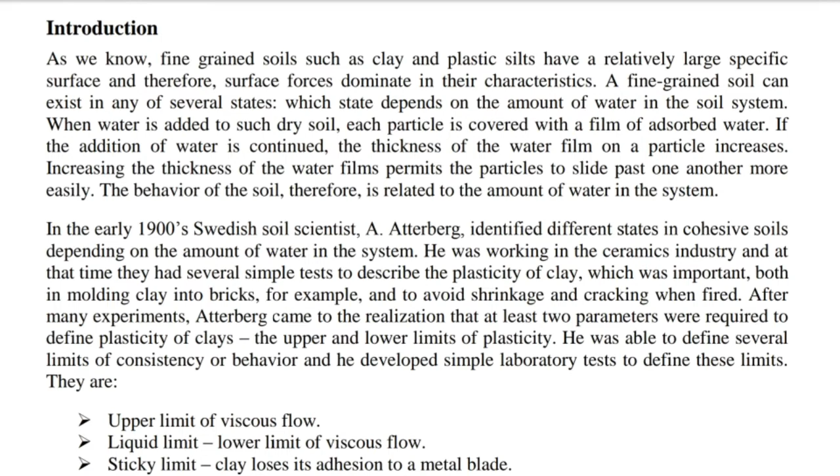They are: upper limit of viscous flow, liquid limit; lower limit of viscous flow; sticky limit, clay loses its adhesion to a metal blade; cohesion limit, grains cease to cohere to each other; plastic limit, lower limit of the plastic state; shrinkage limit, lower limit of the volume change.

He also defined the plasticity index, which is a range of water content where the soil is plastic, and he was the first to suggest that it could be used for soil classification. Later on, in the late 1920s, Terzaghi and A. Casagrande (1932b), working for the U.S. Bureau of Public Roads, standardized the Atterberg limits so that they could be readily used for soil classification purposes.

In present geotechnical engineering practice, we usually use the liquid limit LL or wL, the plastic limit PL or wP, and sometimes the shrinkage limit SL or wS. The sticky and the cohesion limits are more useful in ceramics and agriculture.

Since the Atterberg limits are water contents where the soil behavior changes from one phase to another phase, we can show these limits on a water content continuum. Also shown are the types of soil behavior for given ranges of water contents. As the water content increases, the state of the soil changes from a brittle solid to a plastic solid and then to a viscous liquid.

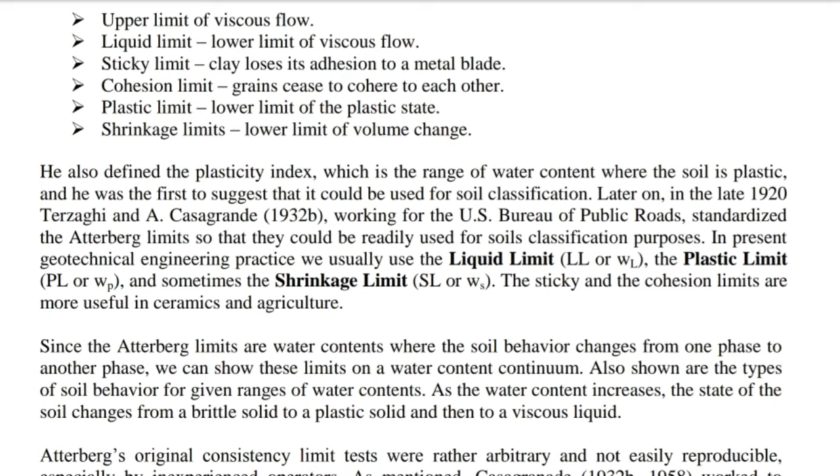Atterberg's original consistency limit tests were rather arbitrary and not easily reproducible, especially by inexperienced operators. As mentioned, Casagrande (1932b, 1958) worked to standardize the test, and he developed the liquid limit device, figure 3.2, so that the test became more operator independent.

He defined the LL as that water content at which a standard groove cut in the remolded soil sample by a grooving tool, figure 3.2a-b, will close over a distance of 13 mm (1/2 inch) at 25 blows of the LL cup falling 10 mm on a hard rubber or micarta plastic base, figure 3.2c.

In practice, it is difficult to mix the soil so that the groove closure occurs at exactly 25 blows, but Casagrande found that if you plot the water contents of tests where you get closure at other blow counts versus the logarithm of the number of blows, you get a straight line called the flow curve. Where the flow curve crosses 25 blows, that water content is defined as the liquid limit.

The plastic limit test is somewhat more arbitrary, and it requires some practice to get consistent and reproducible results. The PL is defined as the water content at which a thread of soil just crumbles when it is carefully rolled out to a diameter of 3 mm. It should break up into segments about 3 to 10 mm long.

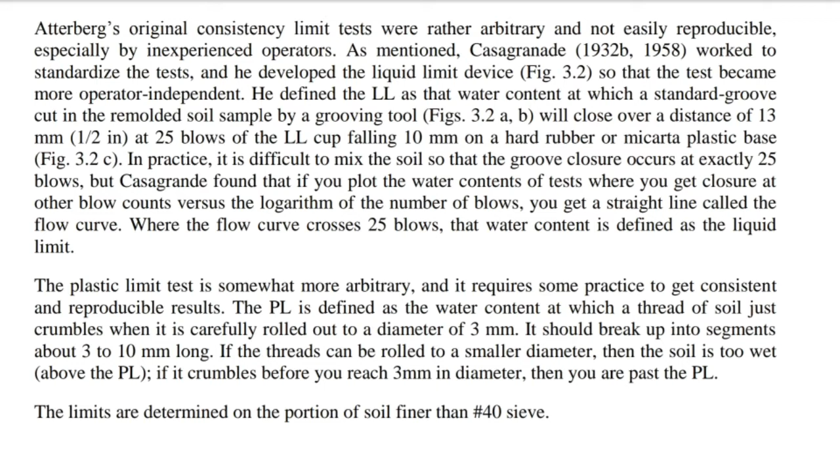If the threads can be rolled to a smaller diameter, then the soil is too wet, above the PL. If it crumbles before you reach 3 mm in diameter, then you are past the PL. The limits are determined on the portion of soil finer than the No. 40 sieve.

Shrinkage limit SL is defined as the moisture content at which no further volume change occurs with further reduction in moisture content. SL represents the amount of water required to fully saturate the soil, 100% saturation. It is needed in producing bricks and ceramics. Scope of the test. This test is performed to determine the plastic and liquid limits of fine-grained soils.

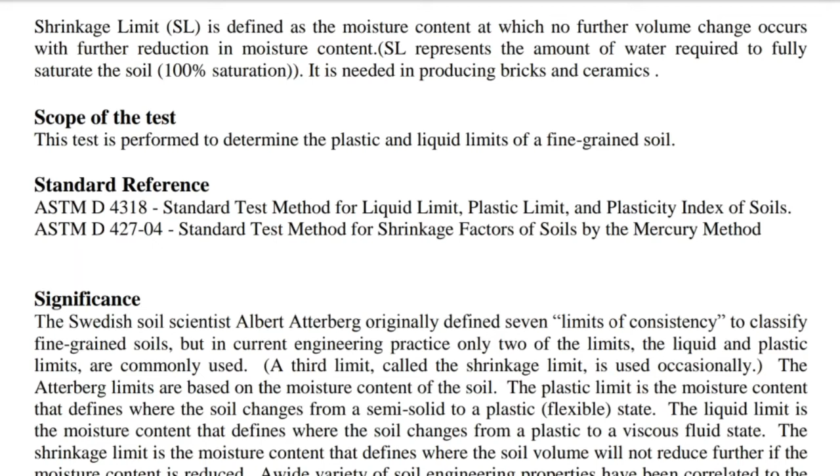Significance. The Swedish soil scientist Albert Atterberg originally defined 7 limits of consistency to classify fine-grained soils, but in current engineering practice, only 2 of the limits, the liquid and plastic limits, are commonly used. A third limit, called the shrinkage limit, is used occasionally.

The Atterberg limits are based on the moisture content of the soil. The plastic limit is the moisture content that defines where the soil changes from a semi-solid to a plastic flexible state. The liquid limit is the moisture content that defines where the soil changes from a plastic to a viscous fluid state. The shrinkage limit is the moisture content that defines where the soil volume will not reduce further if the moisture content is reduced.

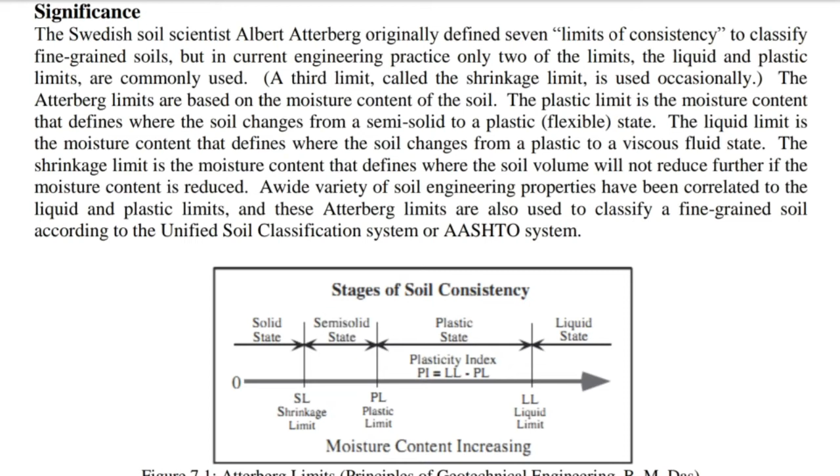A wide variety of soil engineering properties have been correlated to the liquid and plastic limits, and these Atterberg limits are also used to classify a fine-grained soil according to the Unified Soil Classification System or AASHTO system.

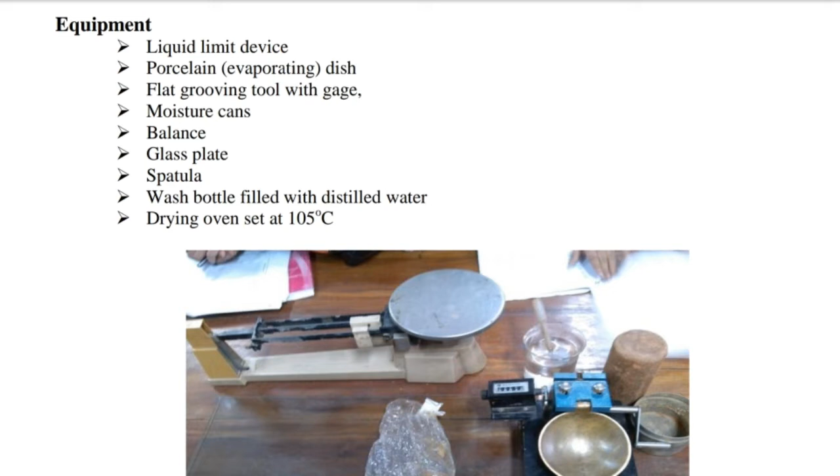Equipment: liquid limit device, porcelain evaporating dish, flat grooving tool with gauge, moisture cans, balance, glass plate, spatula, wash bottle filled with distilled water, drying oven set at 105 degrees C.

Test procedure. Liquid limit. 1. Take roughly 3/4 of the soil and place it into the porcelain dish. Assume that the soil was previously passed through a number 40 sieve, air dried and then pulverized. Thoroughly mix the soil with a small amount of distilled water until it appears as a smooth uniform paste. Cover the dish with cellophane to prevent moisture from escaping.

2. Weigh 4 of the empty moisture cans with their lids and record the respective weights and can numbers on the data sheet. 3. Adjust the liquid limit apparatus by checking the height of drop of the cup. The point on the cup that comes in contact with the base should rise to a height of 10 mm. The block on the end of the grooving tool is 10 mm high and should be used as a gauge. Practice using the cup and determine the correct rate to rotate the crank so that the cup drops approximately 2 times per second.

4. Place a portion of the previously mixed soil into the cup of the liquid limit apparatus at the point where the cup rests on the base. Squeeze the soil down to eliminate air pockets and spread it into the cup at a depth of about 10 mm at its deepest point. The soil pat should form an approximately horizontal surface.

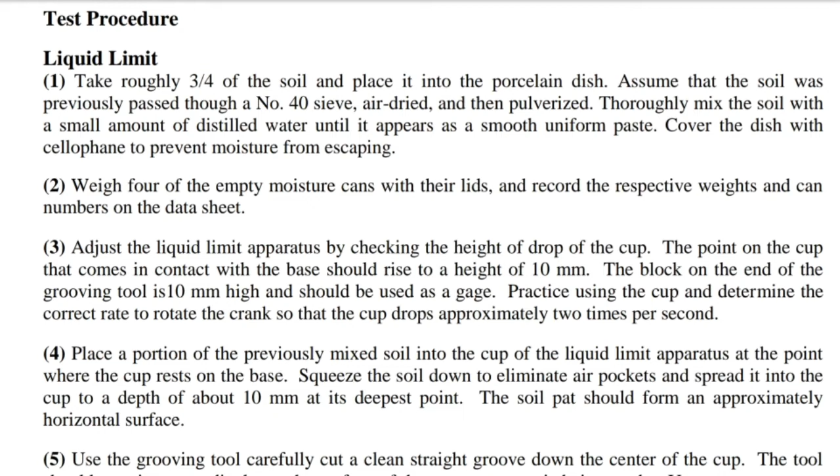5. Use the grooving tool carefully. Cut a clean straight groove down the center of the cup. The tool should remain perpendicular to the surface of the cup as the groove is being made. Use extreme care to prevent sliding the soil relative to the surface of the cup.

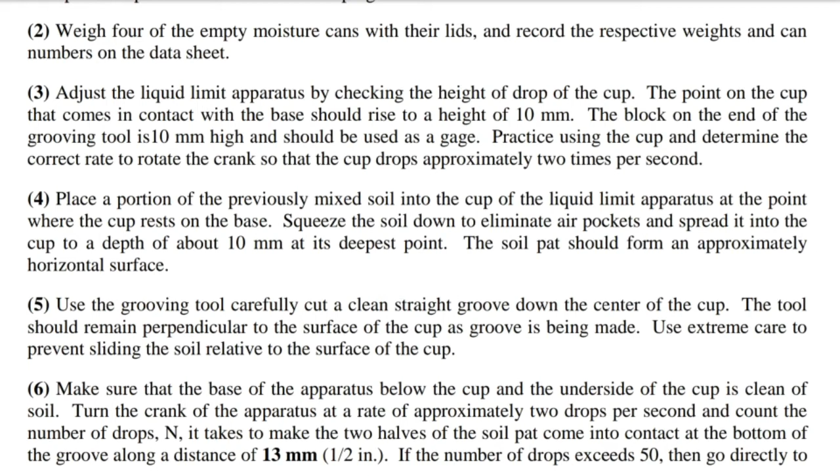6. Make sure that the base of the apparatus below the cup and the underside of the cup is clean of soil. Turn the crank of the apparatus at a rate of approximately 2 drops per second and count the number of drops it takes to make the two halves of the soil pat come into contact at the bottom of the groove along a distance of 13 mm, 1/2 inch. If the number of drops exceeds 50, then go directly to step 8 and do not record the number of drops, otherwise record the number of drops on the data sheet.

7. Take a sample using the spatula from edge to edge of the soil pat. The sample should include the soil on both sides of where the groove came into contact. Place the soil into a moisture can, cover it. Immediately weigh the moisture can containing the soil, record its mass, remove the lid and place the can into the oven. Leave the moisture can in the oven for at least 16 hours.

Place the soil remaining in the cup into the porcelain dish. Clean and dry the cup on the apparatus and the grooving tool. 8. Remix the entire soil specimen in the porcelain dish. Add a small amount of distilled water to increase the water content so that the number of drops required for closing the groove decreases.

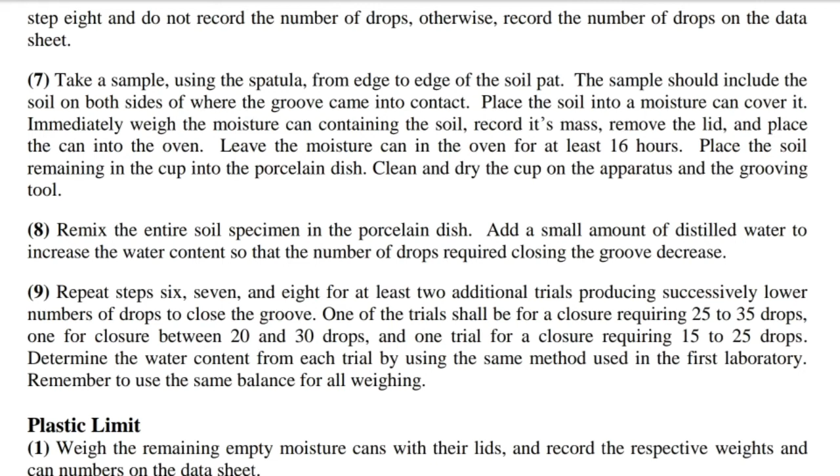9. Repeat steps 6, 7 and 8 for at least 2 additional trials, producing successively lower numbers of drops to close the groove. One of the trials shall be for a closure requiring 25 to 35 drops, one for closure between 20 and 30 drops, and one trial for closure requiring 15 to 25 drops. Determine the water content from each trial by using the same method used in the first laboratory. Remember to use the same balance for all weighing.

Plastic limit. 1. Weigh the remaining empty moisture cans with their lids and record the respective weights and can numbers on the data sheet. 2. Take the remaining 1/4 of the original soil sample and add distilled water until the soil is at a consistency where it can be rolled without sticking to the hands. 3. Form the soil into an ellipsoidal mass. Roll the mass between the palm or the fingers and the glass plate.

Use sufficient pressure to roll the mass into a thread of uniform diameter by using about 90 strokes per minute. A stroke is one complete motion of the hand forward and back to the starting position. The thread shall be deformed so that its diameter reaches 3.2 mm, 1/8 inch, taking no more than 2 minutes. 4. When the diameter of the thread reaches the correct diameter, break the thread into several pieces.

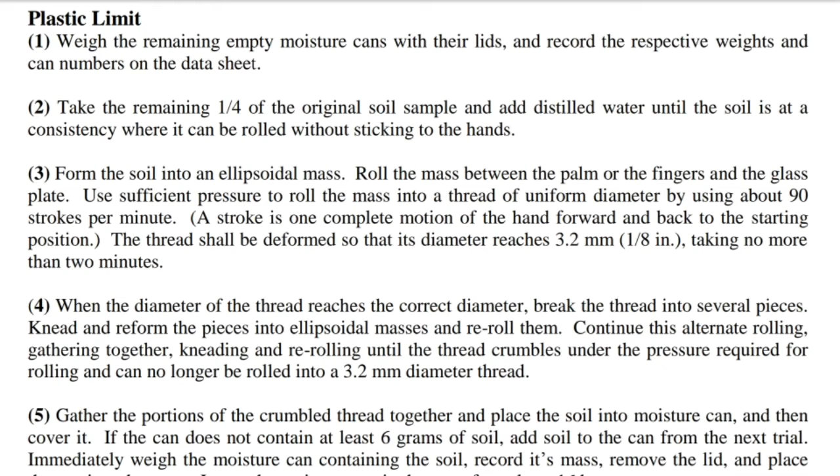Knead and reform the pieces into ellipsoidal masses and re-roll them. Continue this alternate rolling, gathering together, kneading and re-rolling until the thread crumbles under the pressure required for rolling and can no longer be rolled into a 3.2 mm diameter thread.

5. Gather the portion of the crumbled thread together and place the soil into the moisture can and then cover it. If the can does not contain at least 6 grams of soil, add soil to the can from the next trial. Immediately weigh the moisture can containing the soil, record its mass, remove the lid and place the can into the oven. Leave the moisture can in the oven for at least 16 hours.

6. Repeat steps 3, 4 and 5 at least 2 more times. Determine the water content from each trial by using the same method used in the first laboratory. Remember to use the same balance for all weighing.

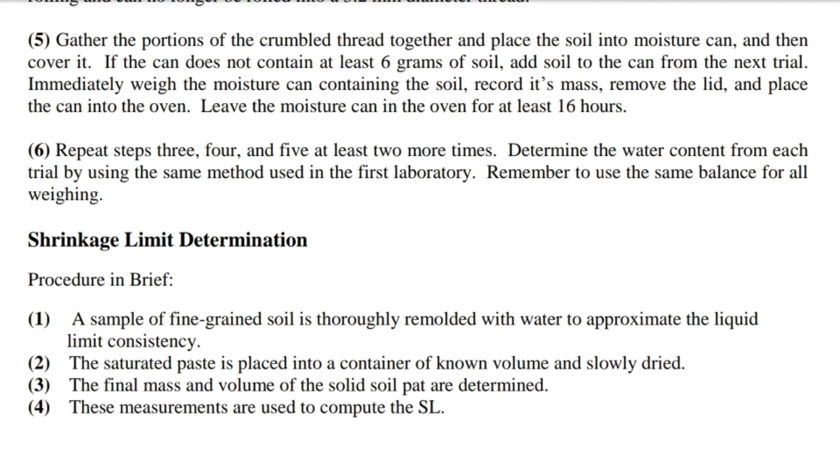Shrinkage limit determination. Procedure in brief. 1. A sample of fine-grained soil is thoroughly remolded with water to approximate the liquid limit consistency. 2. The saturated paste is placed into a container of known volume and slowly dried. 3. The final mass and volume of the solid soil pat are determined. 4. These measurements are used to compute the SL.

Procedure in detail. Volume of wet soil pat. 1. Make the soil paste of liquid consistency. 2. Coat the inside of the shrinkage dish with a thin layer of petroleum jelly, silicone grease or similar lubricant to prevent the adhesion of the soil to the dish. 3. Determine and record the mass in grams of the empty dish.

4. Place the shrinkage dish in the shallow pan in order to catch any mercury overflow. 5. Fill the shrinkage dish to overflowing with mercury. 6. Remove the excess mercury by pressing the glass plate firmly over the top of the shrinkage dish. 7. Determine the volume of mercury held in the shrinkage dish either by means of the glass graduate or by dividing the measured mass of mercury by the mass density of mercury, equal to 13.55 Mg per m cube. 8. Record this volume in cubic centimeters of the wet soil pat V.

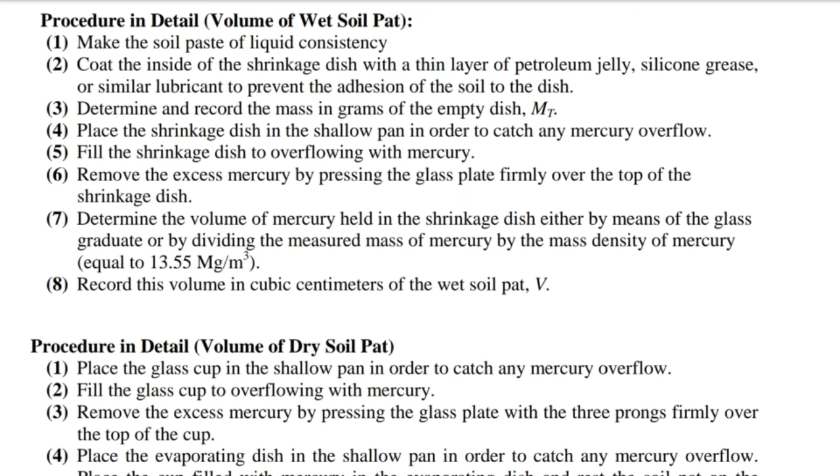Procedure in detail. Volume of dry soil pat. 1. Place the glass cup in the shallow pan in order to catch any mercury overflow. 2. Fill the glass cup to overflowing with mercury. 3. Remove the excess mercury by pressing the glass plate with the three prongs firmly over the top of the cup. 4. Place the evaporating dish in the shallow pan in order to catch any mercury overflow. Place the cup filled with mercury in the evaporating dish and rest the soil pat on the surface of the mercury. It will float.

5. Using the glass plate with the three prongs, gently press the pat under the mercury and press the plate firmly over the top of the cup to expel any excess mercury. Observe that there is no air trapped between the plate and mercury. 6. Measure the volume of the mercury displaced into the evaporating dish either by means of glass graduate or by dividing the measured mass of mercury by the mass density of mercury. 7. Record the volume in cubic centimeters of the dry soil pat Vo.

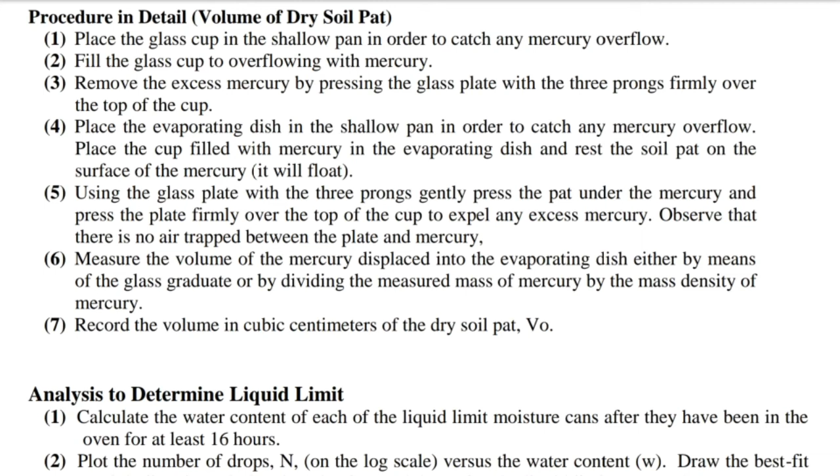Analysis to determine liquid limit. 1. Calculate the water content of each of the liquid limit moisture cans after they have been in the oven for at least 16 hours. 2. Plot the number of drops N on the log scale versus the water content W. Draw the best fit straight line through the plotted points and determine the liquid limit LL as the water content at 25 drops.

Analysis to determine plastic limit. 1. Calculate the water content of each of the plastic limit moisture cans after they have been in the oven for at least 16 hours. 2. Compute the average of water contents to determine the plastic limit PL. Check to see if the difference between the water contents is greater than the acceptable range of two results, 2.6%. 3. Calculate the plasticity index, PI is equal to LL minus PL. Report the liquid limit, plastic limit and plasticity index to the nearest whole number, omitting the percent designation.

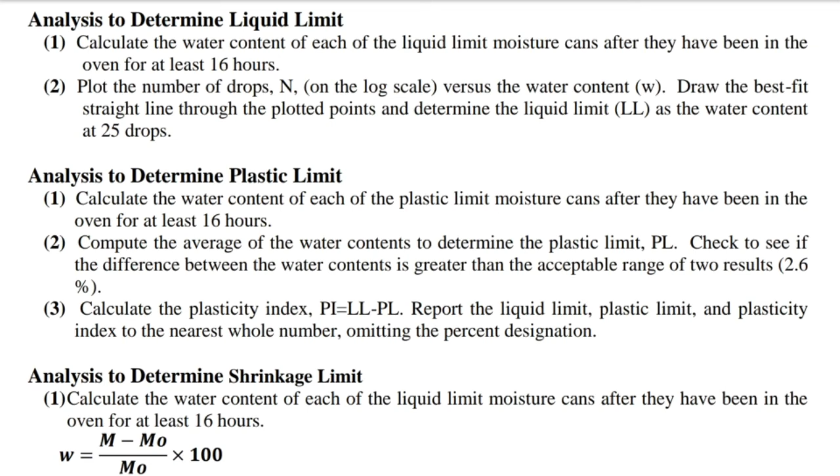Analysis to determine shrinkage limit. 1. Calculate the water content of each of the liquid limit moisture cans after they have been in the oven for at least 16 hours. W is equal to M minus M naught divided by M naught into 100. 2. Compute shrinkage limit by the following equation. SL is equal to W minus (V minus V naught) rho W divided by M naught into 100.